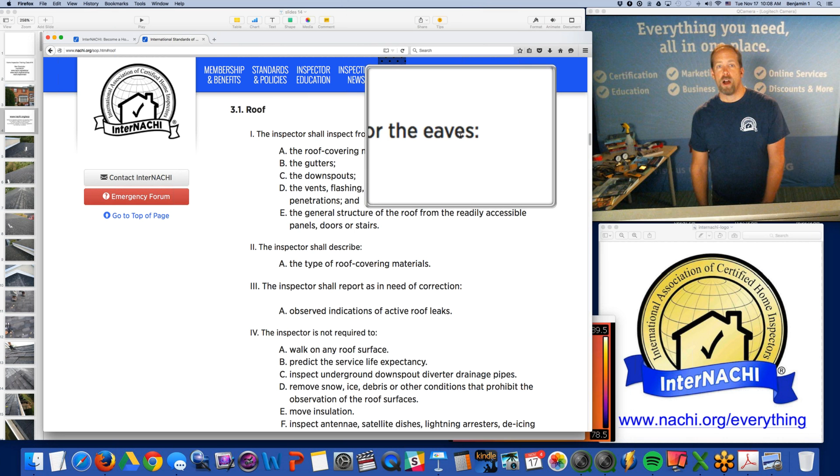The roof covering materials, the gutters, the downspouts, the vents, flashing, skylights, chimney and other roof penetrations, the general structure of the roof from readily accessible panels, doors, and stairs. You have to describe the roof covering materials and report as in need of correction any observed indications of active roof leaks. That's pretty easy. I understand that. So let's do that.

But when I get up there, I basically take pictures of every field, every plane, every surface first. And then I focus in on a few things. I also take my brand picture.

This kind of picture is in the inspection report so that someone else, other than my client—maybe a friend of my client, a coworker of my client—reading the inspection report, because I know I give multiple copies out and they pass them out, and the real estate agents read them too, they'll come upon this picture and go, that's the inspector I want to hire. So that is what I do in order to beat my competition.

Also, I make sure that my clients know that I inspect the roof up close. So my hand is typically in the pictures, the video, and the inspection report a lot, so that they understand I'm there personally and up close. And while I'm on the roof, I want to take a look at the gutter as well, and also the back yard and any components back there.

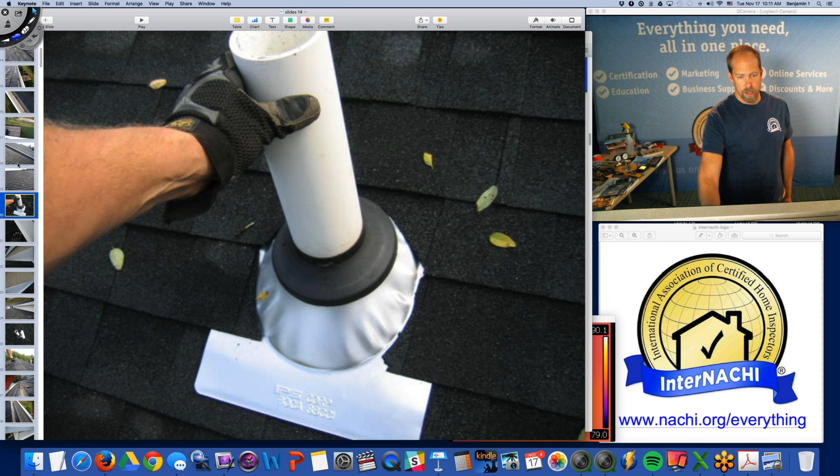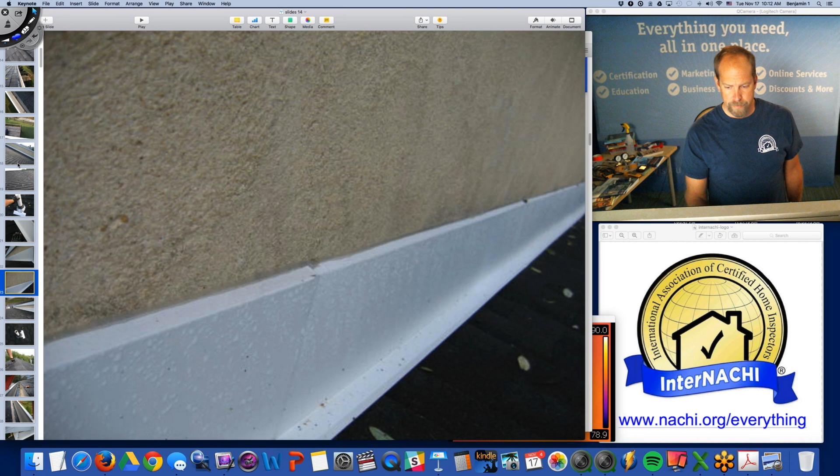And that's from the roof. The roof is in good shape. New, actually, not original to the house, because I could see from the neighbor has an older roof in poor shape, original. So I can kind of gauge the roofing materials. And there's a step flashing, so I can see counter flashing. It's sealed along the stucco. That's nice, the workmanship is really sweet. And I can also see step flashing installed. That's really good, I like that a lot. Really good details.

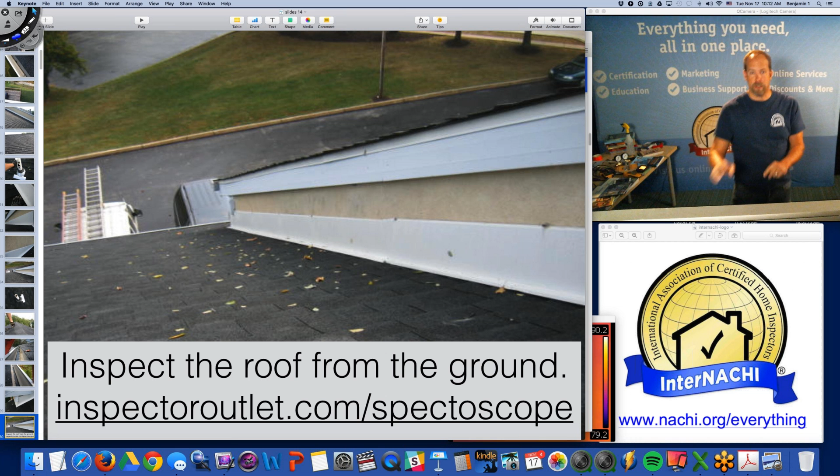So if you don't want to inspect the roof by standing on the roof, there are a few options. You're required to inspect it, but you can inspect it from the ground, maybe with some binoculars, or we have a spectoscope, so you can inspect the roof from the ground essentially using it. The spectoscope is a tool, again, from inspectoroutlet.com, and it's a really high-tech way to inspect the roof.

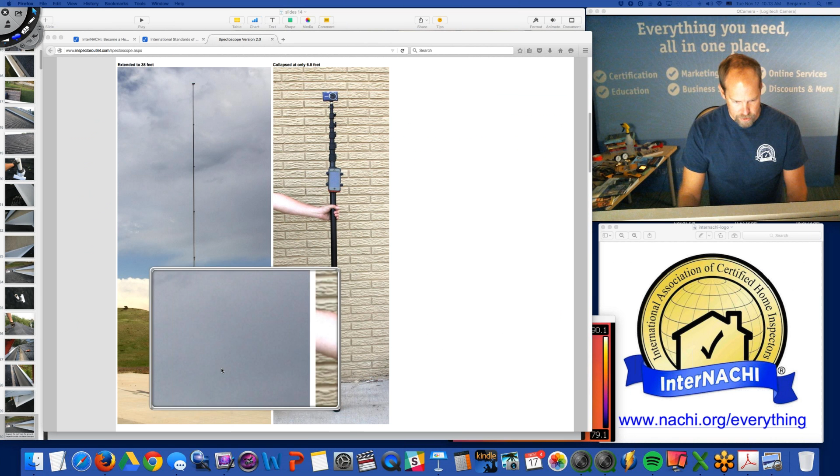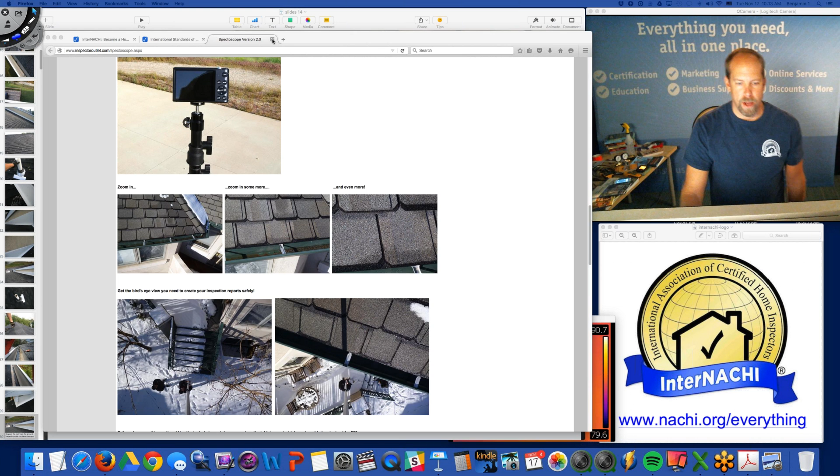This pole extends about 38 feet up in the sky. There's a wireless connection from your mobile device, iPhone or iPad for example, and it connects to the camera on top of the pole. It's very lightweight, and it collapses down to about 6 feet. There's some pictures there. So this is the home inspector down there, and the pole goes all the way up to the top. Yep, so that's a great tool that you may want to consider using.

You may have to, if you and I were in competition, because I'm getting up on the roof. How are you going to distinguish yourself from others? How are you going to ensure that you are inspecting the roof just as good as me? If I'm inspecting the roof better, how are you going to beat me in the market? You have to think like this: what is your brand, how do you do things, what is your message, how do you inspect the roof better than your competition? If you can do that for every system and component, you basically are better. You should be hired regardless of your prices, right? It's the service and value of what you bring.

As I come down the ladder, I see some opening gaps where the different materials intersect. There's a shift, could be a little settlement. I'm not too concerned, I'm concerned about water penetration. It's kind of a maintenance issue. But I'm going to take a look on the inside, see if that window was jarred, maybe replaced. Something's going on, and this is always a problem with these little bay window roofs.

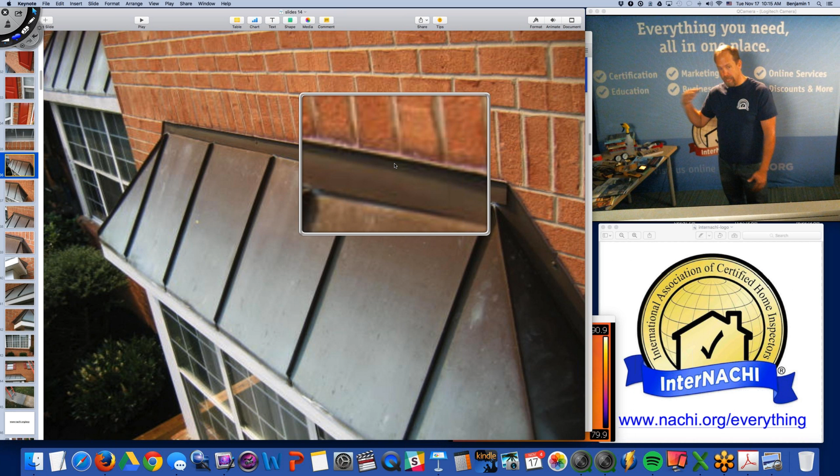The flashing is not grooved into the masonry, unfortunately. Basically, you get a piece of metal, you glue it up, and you fasten it onto the masonry. That's not always great. So when I'm on the inside, I keep remembering what I see on the outside. I got that stuff on the back side of the backyard, and now I have this in the front, and I want to make sure I see this on the inside of the home, because there's usually a problem in my experience with this type of installation.

So now I'm done with the roof. I get down from the roof and use a mobile device. That's how I can do 2 inspections a day. I spend about 3 hours per inspection, about an hour driving in the morning and in between, and I'm home before 5. So mobile devices are really handy.

When you do the inspection, you stop after every system, enter the data, the condition of the roof and all the things you were supposed to inspect, tap, tap, tap, and make sure you took your pictures. Now you're done with that system, done with the report for that entire system. I don't have to write it at night at home. I want to be with my kids, my family, my wife, chill out. I don't want to be in the office. I'm done writing, so when I'm driving home, I'm actually done with my work. I'm completely done with my inspection reports because I buy software with mobile device capabilities.

A lot of people ask me that.

By this time, my client, remember I show up early, is in the driveway, or maybe hanging around, and I can talk to them. I come down, first thing I do is, if I can write my report, great. I smile and shake my client's hand, and typically their agent, maybe family members, and pass out a lot of cards. I don't give 1 card to a person, I always give 5, I pass them out. And you can order marketing through InterNACHI. We design all the marketing for you for free.

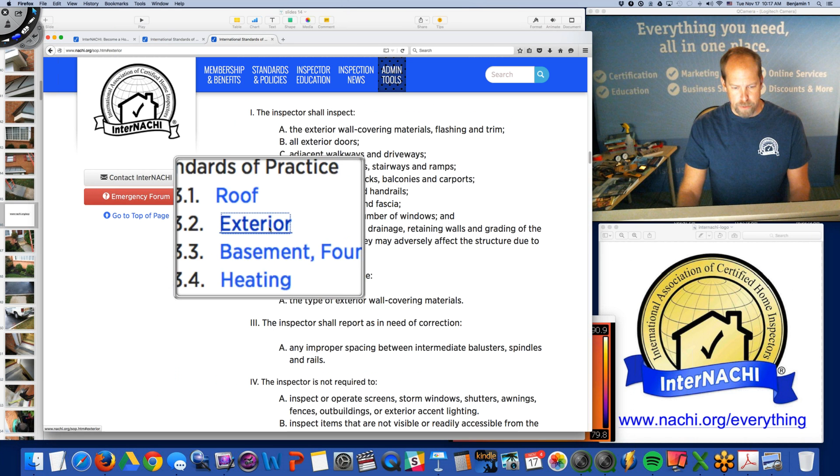How do I do the exterior inspection? Well, I follow the SOP. The SOP tells me exactly what to inspect - the inspector shall inspect these things. So it's pretty easy, that's the procedure that I use.

So on this home, narrow home, townhome, I'm looking at this trip hazard at the front walk. The walk could be raised up. I always take a picture of my truck.

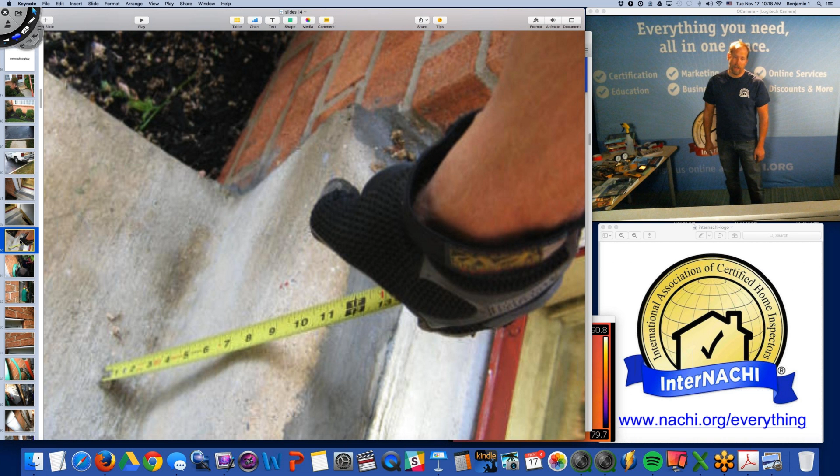When I inspect a door, I inspect top left corner, top right corner, bottom left corner, bottom right corner. This door tread landing area was sealed up with some masonry that's probably going to crack later on, but they probably should seal it with something that can expand and contract. I always take a picture of me taking a measurement of any trip hazards. This is good - easy 7-11 rule of thumb that I use.

There are personal items in my way. A picture's worth 1,000 words - I can't see everything. There's dense vegetation and a lot of things in my way.

They were using some spray stuff, no big deal, but I was taking a picture of the window, actually. The header on the window is an iron steel I-beam, essentially, above the window opening, holding up the exterior materials, the masonry materials above this opening. The mortar is then applied on the outside, typically really thin, like 1/2 inch, 1/4 inch. When the metal is exposed to moisture, which sometimes happens, it swells a little bit, pops the masonry. The mortar is loose, it blows out. The aluminum capping is sometimes open as well. This can be easily sealed up along here.

And we can talk about weep holes as well later on.

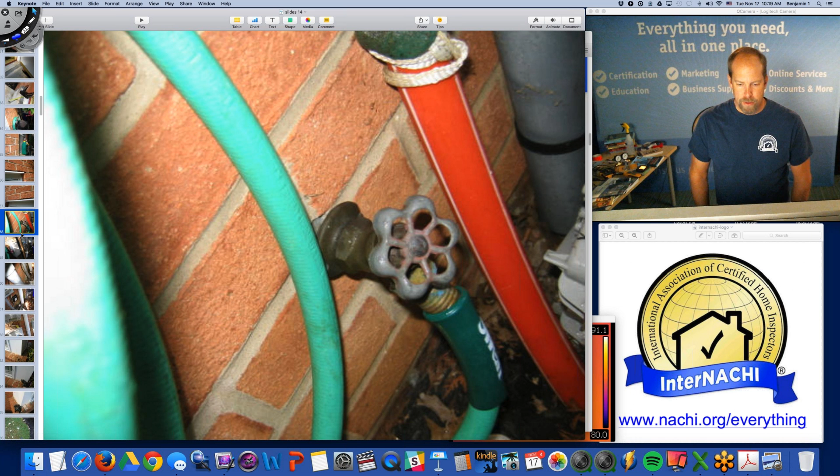Frost-free hose bibs - this is a home in Pennsylvania, so it's a cold winter climate, and these water pipes, these water faucets, hose bibs, freeze up and burst. So this should be a frost-free hose bib, and it's not.

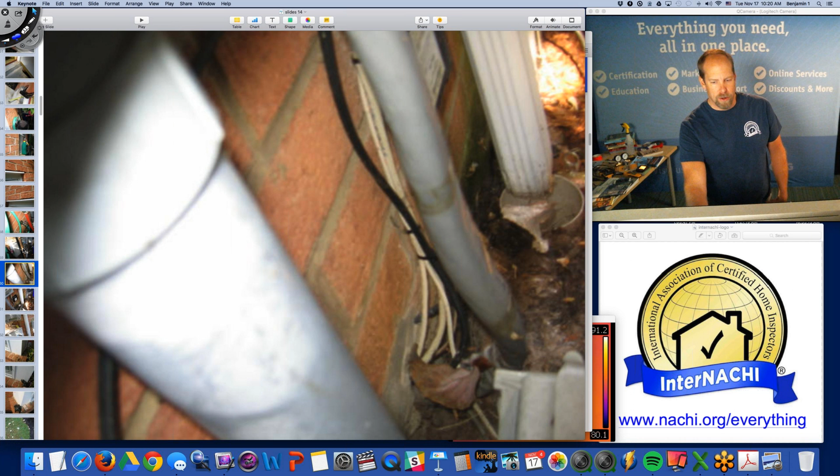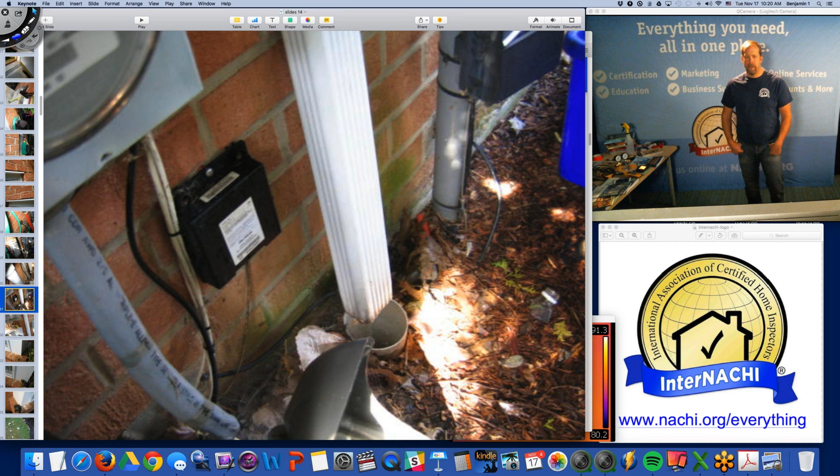There's the electric meter, electric line going down into the panel, down in the basement - I'm assuming there's a basement now. And a disconnected downspout to the underground pipes. You're not required to inspect underground pipes, underground anything. There's a bit of a disconnect between the downspout and this underground pipe. Probably the grade just settled a few inches, and no one's noticed it because it's under dense vegetation.

And I love to take a close look at where different materials intersect with each other. How does this wood, which is a one inch plywood piece of material, natural wood, is it wicking up moisture?

The bottom is probably not primed or painted. I don't see any flashing kicking out water from the wall, maybe the space behind the exterior material. It's simply sealed up, and there's some deterioration of the paint and the wood.

So I'm at least going to tap, push with my fingers, tap with my screwdriver, and probe with my screwdriver. That's something to be monitored. There's exterior drainage, an underground pipe right there, probably connected to the downspout underground pipe. Some utility connections, main water shutoff valve in the front yard, and don't forget the doorbell.

Now the deck. Before we get to the deck, I have some questions here, I think.

Stephen asks, how do you handle when a roof is too tall for you to comfortably climb? I don't do anything that's not safe, really.

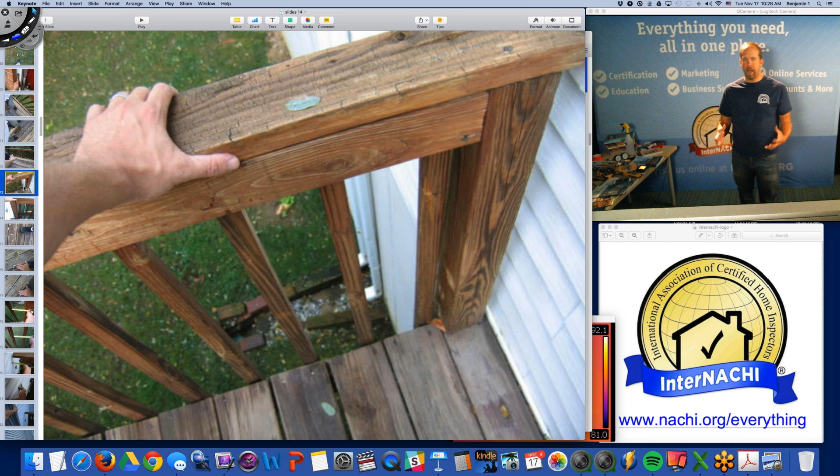Making a lot of money is really two things. You got to be good at what you do, and you got to be good at the message you give. You got to be good at marketing and good at inspections. InterNACHI provides everything — that's why we have that everything page. Everything you need to be successful is there.

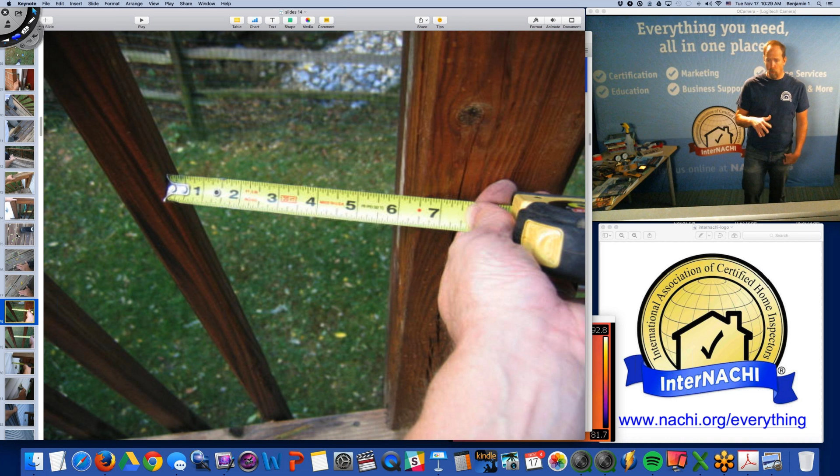Decks. Love decks. Love above ground decks. In Pennsylvania, for some reason, they threw up decks as fast as they possibly could, and they were all really bad. There were a lot of deck collapses. So this one is about 10 or 15 years old, same age as the house. There's spindle spacing issues, so this deck was not built to code when it was built. Some 30-year-old decks have spindle spacing you could fit a truck through.

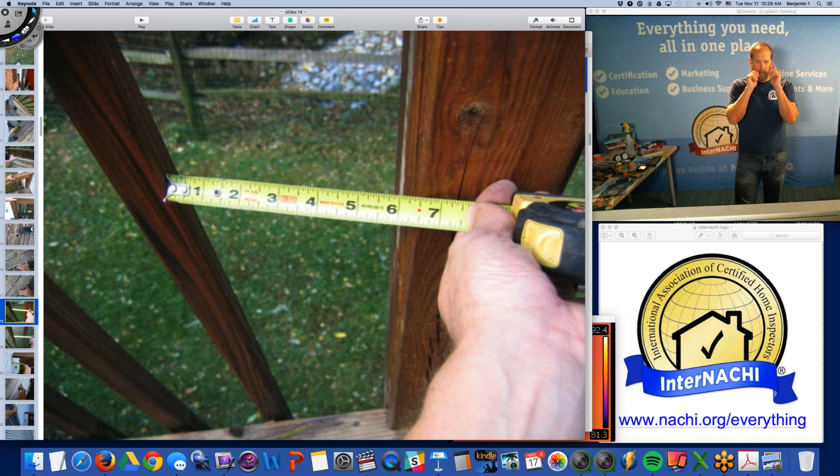I'm not a code inspector, but from modern building standards and best practices — call it code if you want — I know this space is supposed to be really small so a child's head doesn't fall through. I'm calling it out, and it's actually required by the standards of practice. So I take pictures of those hazards.

GFCI should be protected. The vinyl siding looks good. I take a picture all around. I don't know if you noticed, but I just went like this — took a picture, took a picture, took a picture, took a picture. I took 300 pictures on this townhome inspection. I don't take one or two, I take 300 or 400.

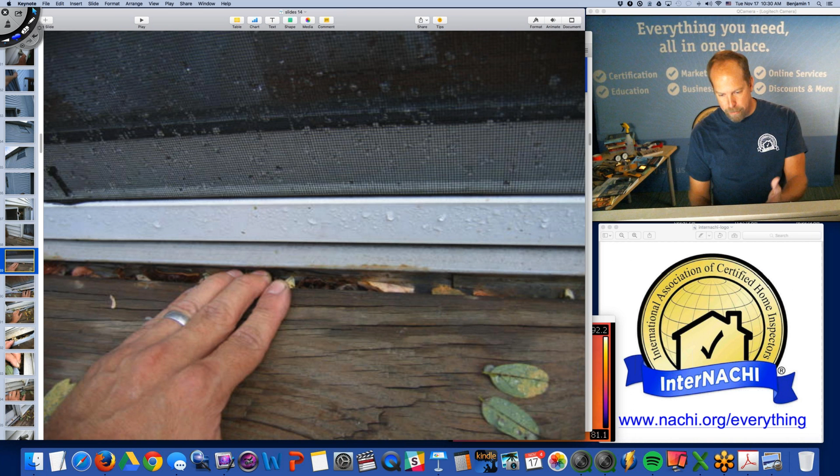Here's an opening in the exterior building envelope, the exterior wall. Top left, top right, bottom left, bottom right — get in there, get up close. Bottom left, I see flashing. Great, awesome, I see metal. There's some separation, like they used step flashing or something underneath the rear door slider.

This would be on the first floor. There's a basement, and a deck on the outside. This is the door slider to the deck in the back. I see flashing, ledger board flashing, but I can actually pull the top edge of the ledger board flashing, and it's been heavily siliconed with white silicone, clear silicone.

So this is a hazard, right? This is a condition that's conducive to deck collapse. I use the word imminent a lot — it shall happen if left alone. This deck will collapse. I'm not even sure if it's safe now to walk on because of this condition. It's historically known that if a deck attached to a house has bad ledger flashing, in a wet climate like this, that area is going to be loose, the deck's not going to be attached, and it's not reliable.

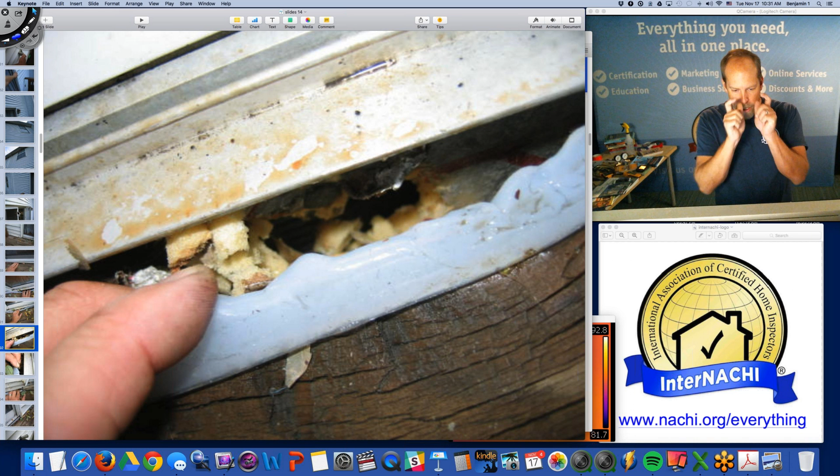So I get up close. There's a little macro, micro setting on every camera — get up nice and close. I see that's the insulation sheathing board of the exterior wall. So now we're even through some layers of exterior material.

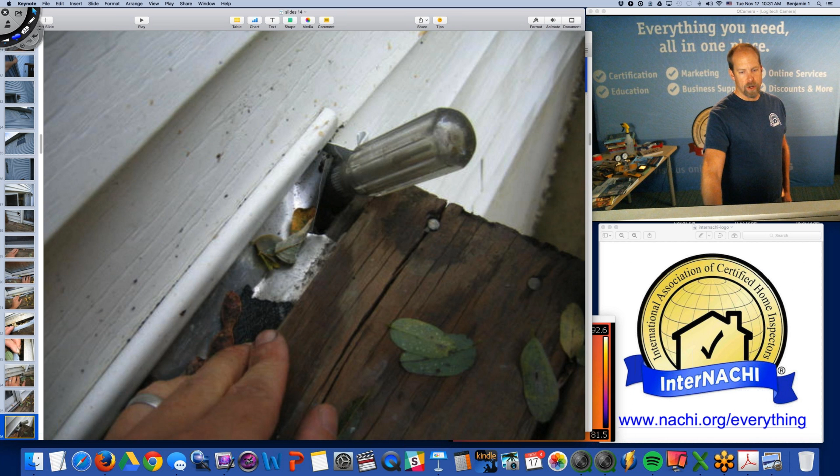And my screwdriver. I love to throw my Husky screwdriver right in a hole to show scale, even though my hands are in there. And there's a hole over there too, at the corner edge of the deck. So the deck is not reliable.

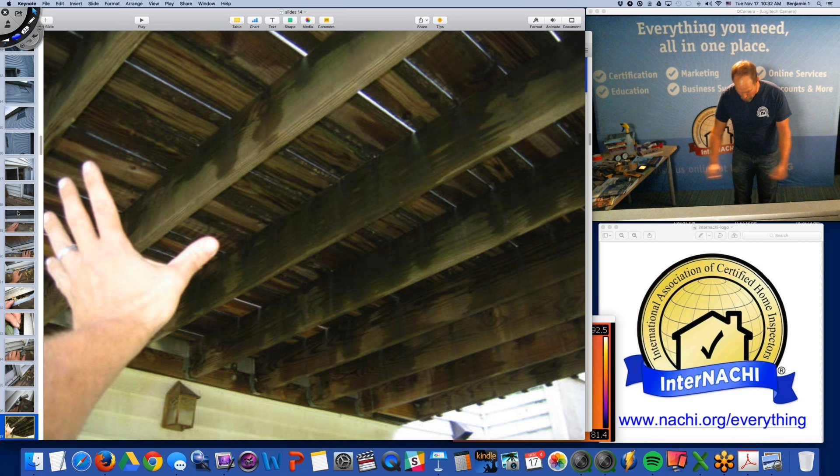I get down from the deck. Now I'm doing the exterior. Did the roof, front, exterior. I'm on the deck, I took off my shoes. I have indoor shoes only, I walk through the house with my indoor shoes only. I come out, I'm holding my exterior shoes, put my exterior shoes on to get on the deck, do my deck thing, come back out, indoor shoes only, go down in the basement, carrying exterior shoes, go out the slider door of the basement, put on my exterior shoes. I respect the house that I'm inspecting as if it were my own.

This deck floor structure is unsafe. It's a material defect, which poses an unreasonable risk to someone who's standing on it, like a home inspector. I have missing floor joist supports. This board is actually pulling out.

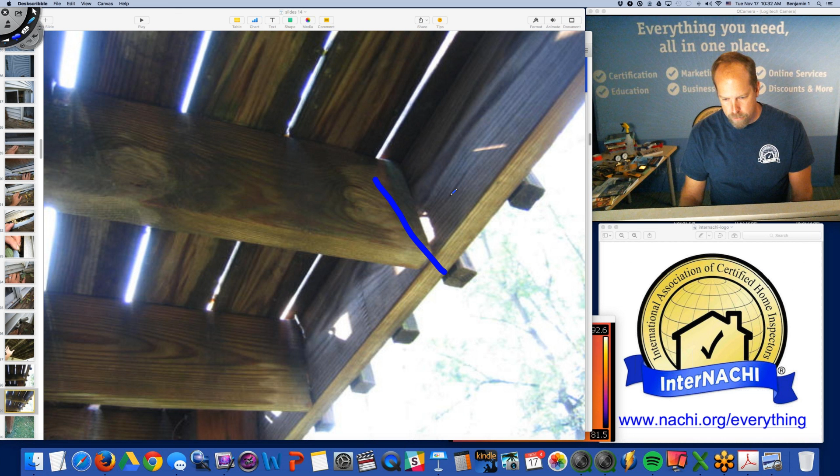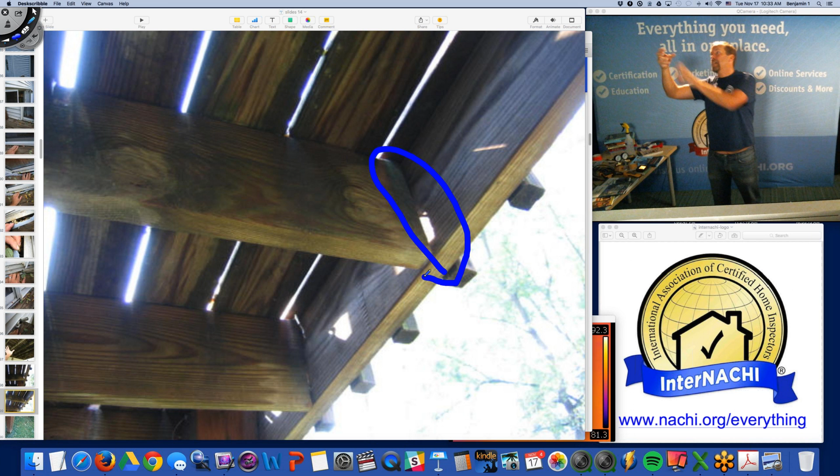And how do I find this? Well, I look at a component, and if it's a structural component, I want to know how it's supported or how it's connected. If there's an end over here, I want to see that end. If there's an end over here, I want to see that. It's very simple. So for all the floor joists, I would love to see where these things are supported. And on the outside ledger board area of this deck, it's actually pulling away. It's withdrawing. You can see the nails. You can see the nail right there. So that's kind of fun.

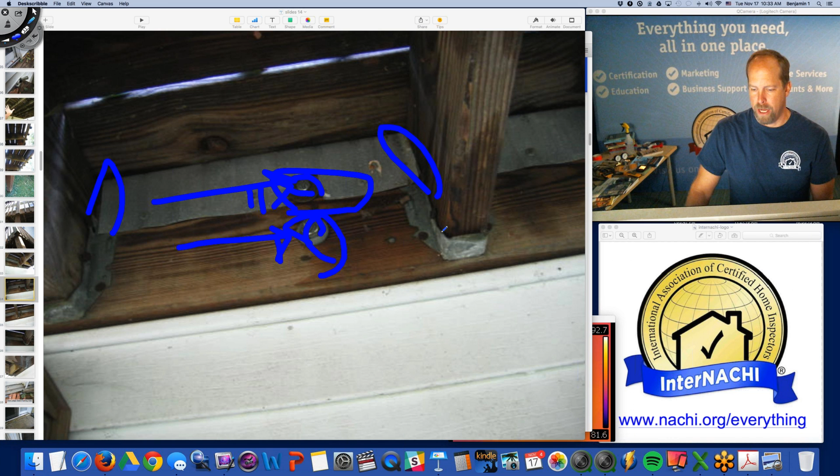So we have a lot of problems. The flashing is not installed properly. We have openings in the flashing. We have some weird stuff with the different types of lag screws. Like they installed this one first, and then they came back and installed this one later. I don't know why, they're different diameters. So if this one is required to be this diameter, why is this one a smaller diameter? Why are there screws with rusty nail heads here? Why is this bottom of the floor joist hanger rusted and corroded? Same thing here, same thing here. This is all messed up, and I don't see any flashing here. So there's supposed to be flashing here, Z flashing here, ledger board flashing here. So a lot of problems with the deck. Needless to say, I didn't ask anyone to go on the deck with me.

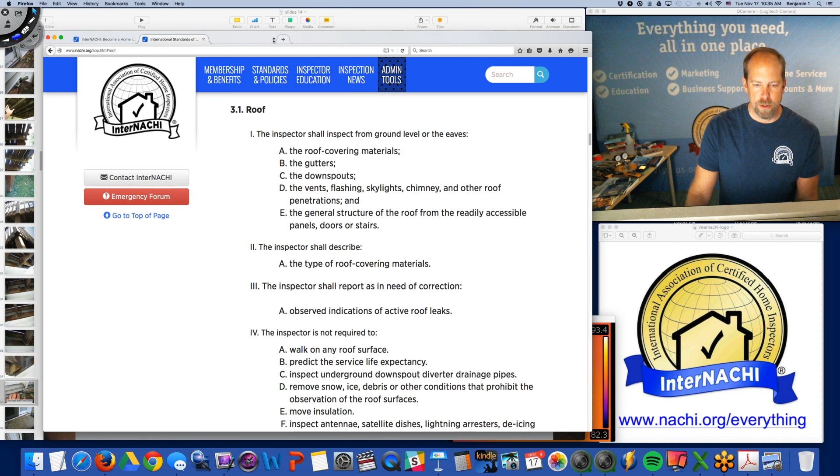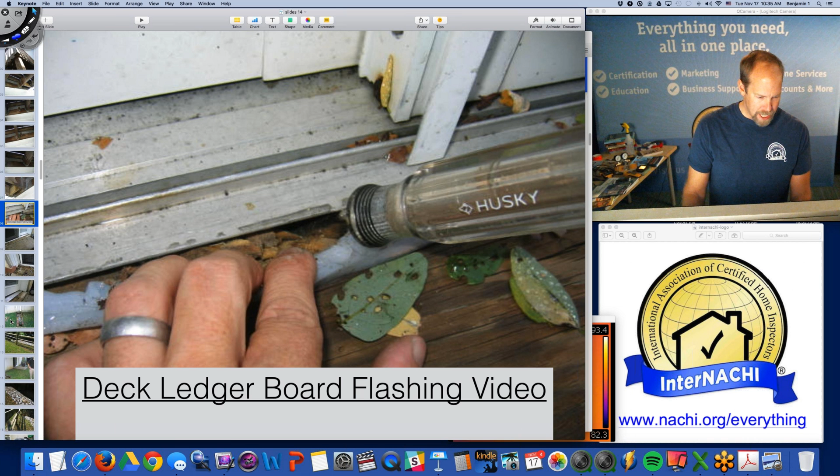So ledger board flashing, we actually have a video. Let's look at both over and under ledger board flashing. So I don't know if you recognize this guy. Now the exterior wall covering below the deck, the bottom Z flashing, counter flashing, sometimes a self-adhesive membrane, the ledger board itself, the top Z flashing, counter flashing that overlaps the Z flashing, and the exterior wall covering, which overlaps the counter flashing. Aluminum flashing is... That's a little training video that we did with some cool graphics, just upon the complexity of installing a proper deck board, ledger board flashing area. It's really complex, and it performs really well when you do it right. And it's a lot of fun to inspect when it's not done well at all.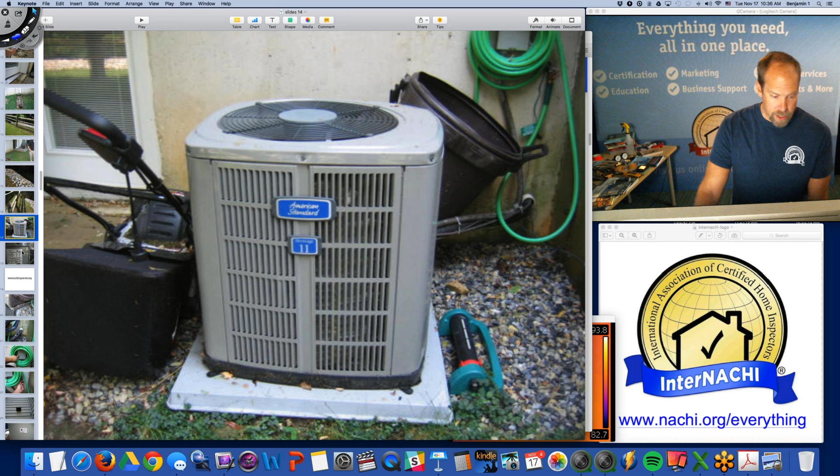American Standard looks like an air conditioner, but it's actually a heat pump. And if you wanted to age a heat pump or an air conditioning unit or a hot water tank, use the serial number. This is the serial number here, right there. I take a picture of all of the manufacturing plates, and you go to buildingcenter.org. This is a fantastic website.

I want to take you there. You click to get the age of the HVAC unit. You have to pick the manufacturer out of this list. So I have to go back—it's Heritage 11. No, that doesn't sound right. It's American Standard; Heritage 11 is the model number. So you go back, and American Standard is right there.

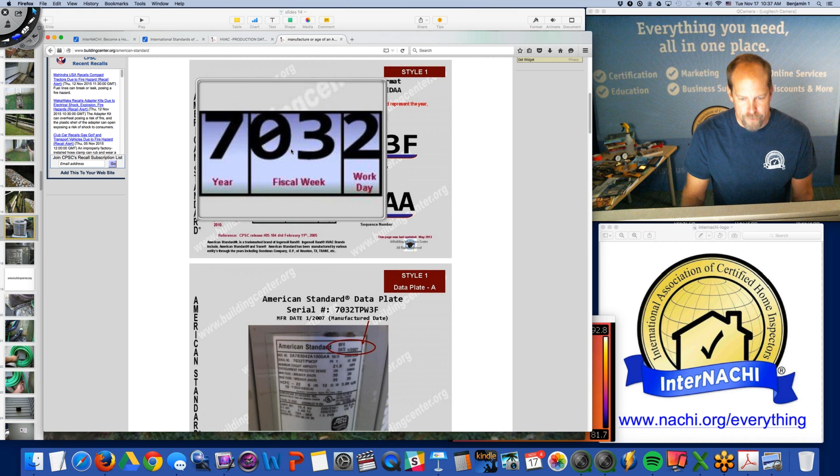You could do this after the inspection. They don't have a very good app for doing it in the field. You have to pick the format for the serial number, and that'll help you determine the age of the unit. This is the format that I have: 4 numbers followed by 4 letters, I think, right? So let's go back—yeah, 4 numbers followed by 4 letters, and it's the serial number, not the model number. The first number is a 4. So what does that mean?

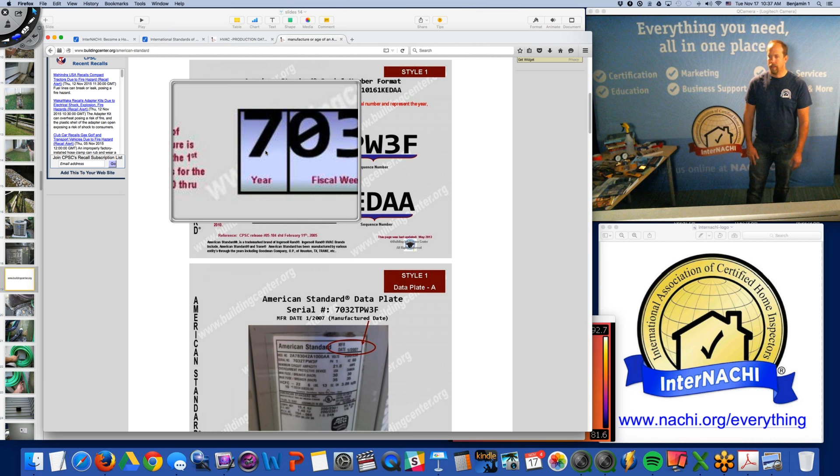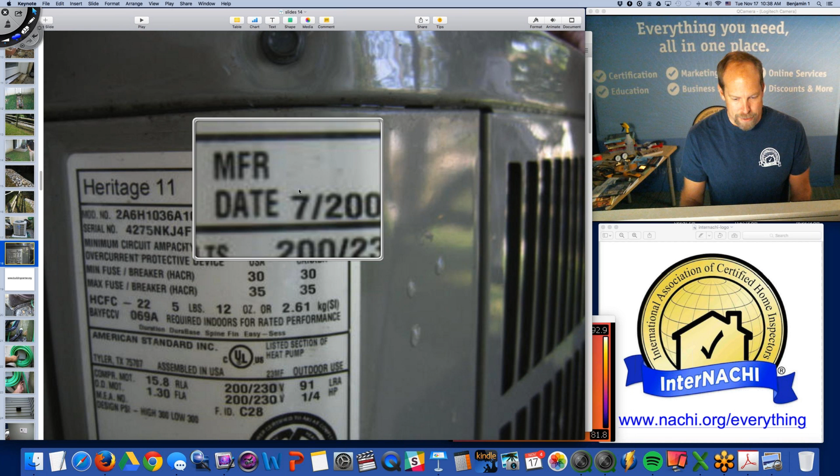Go back here—the first number is the year, and that's an example. 7 is 2007. Well, I have a 4, so it's 2004. And then the week, so I can tell my client exactly how old that heat pump is. It was made in 2004. I didn't have to go through all that, because actually at the top right corner it says manufacturing date, July 2004. But not all manufacturers, like American Standard, provide that nice information for home inspectors—you have to look it up if you want to.

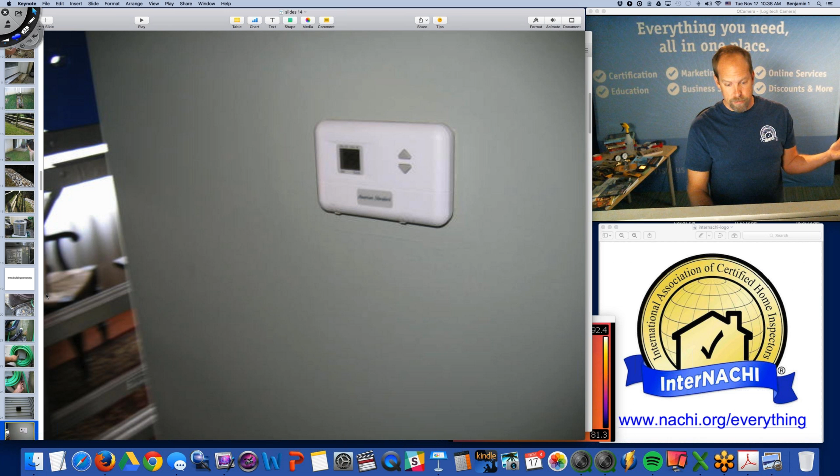Refrigerant line, suction line, insulated, goes through the foundation wall. The electric disconnect is within sight—that's good. No frost-free hose bibs on the back side. That's a bathroom, kitchen, dryer exhaust hood—can't get to it, it's above my head. Thermostat—it's not an efficient programmable thermostat, it's almost like a manual one.

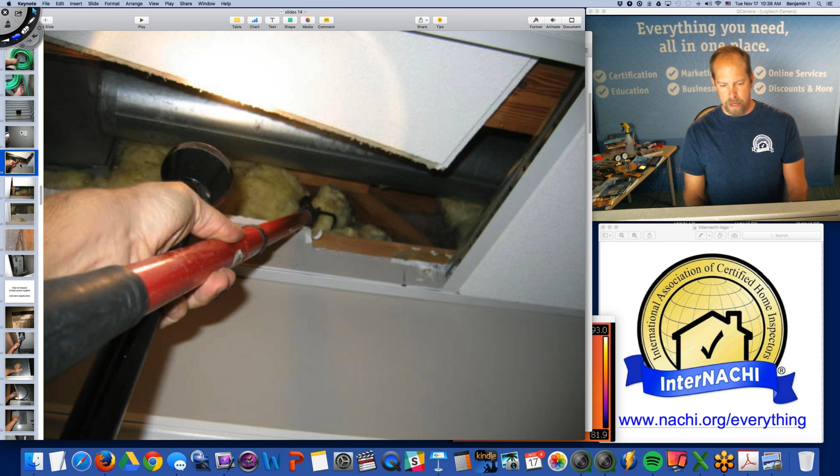I go back in, now I'm doing the interior. I'm in the basement, following the standards of practice about inspecting the structure of the home. And I go right to the ledger board to see if there's anything I can see more—water, mold, moisture, conditions conducive to mold growth. I know you have to follow your local regulations about saying the word mold or being a mold inspector.

I would get licensed or certified if you have that opportunity. It's really worth it, because all good mold inspectors are moisture inspectors. We have a moisture certification program if you're interested in becoming a moisture inspector and then a mold inspector. So I move drop ceiling panels when I need to. I do them randomly, and I do them intentionally at specific areas, like this ledger board area.

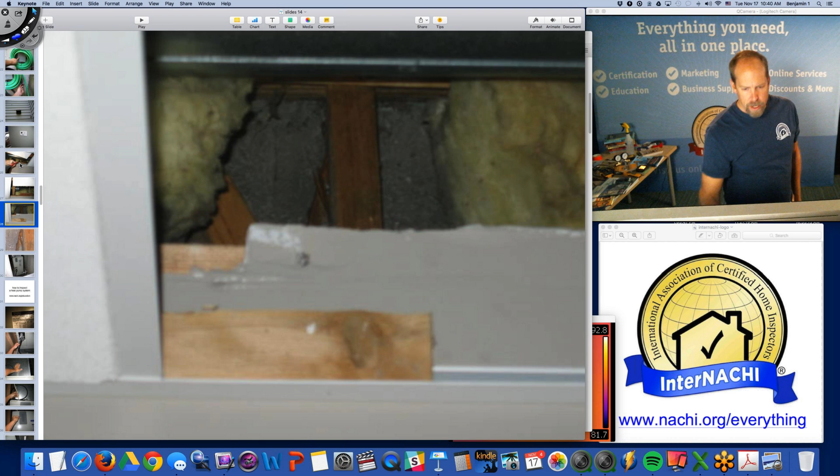You're not required to move drop-down ceiling, but I do, and it usually turns out like a good guess. So here I can see—remember those two lag screws? One was installed bigger and the other a smaller diameter. I think that's because that one missed the structure, the wooden component, so they had to install another one, but I don't know. That's another indication of poor installation—the lag screws of the deck ledger board weren't even attaching securely to the structure of the home.

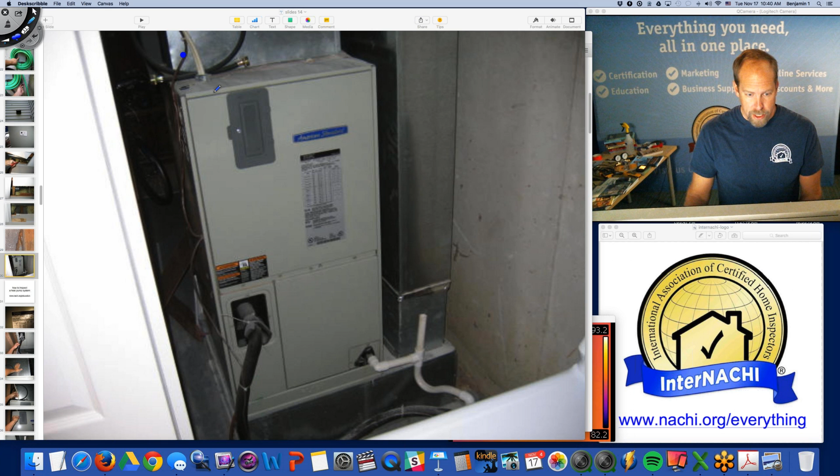Heat pump interior unit, that's the evaporator. I can see a few things from 10 feet away. I know this is not a gas-fired unit, it's electric—there's actually an electric line going into it to the heating element. There's my refrigerant lines going in. I have a condensate line with a trap, that's good, it's draining away. I have ductwork, and by the orientation I can see airflow goes like this. I'm expecting an air filter down here, and air comes up through the evaporator, gets heated or cooled, and then is supplied that way, and I'm looking at all the joints.

Sometimes if I can, I'll take this part off, pull this front off, pull this off, look at something—maybe the evaporator, maybe some other components inside—and take a look on the inside of the unit if I can.

If you don't know how to inspect a heat pump system, no big deal, because InterNACHI has an online course. It's on our main education page—there's a huge list of online courses that are free to our members. If you search for HVAC, you drop down and here's our HVAC course, how to inspect HVAC systems. A heat pump is an HVAC system, and there's a whole chapter on heat pumps, with a short introduction and a really nice graphic about the heating cycle and cooling cycle.

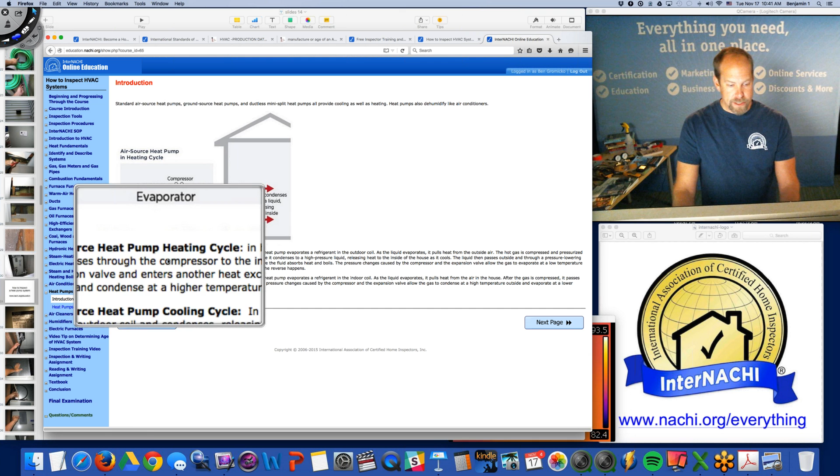And then you click the main slide, and it talks about the types of heat pumps: air source, ground source, ductless mini-split, the cycles, the heating cycle, the cooling cycle, the defrost cycle, the interior heating element, the compressor, a typical defrost cycle, and causes of frost. That's a really good resource to use if you want to know how to inspect a heat pump system, or if you think you already do.

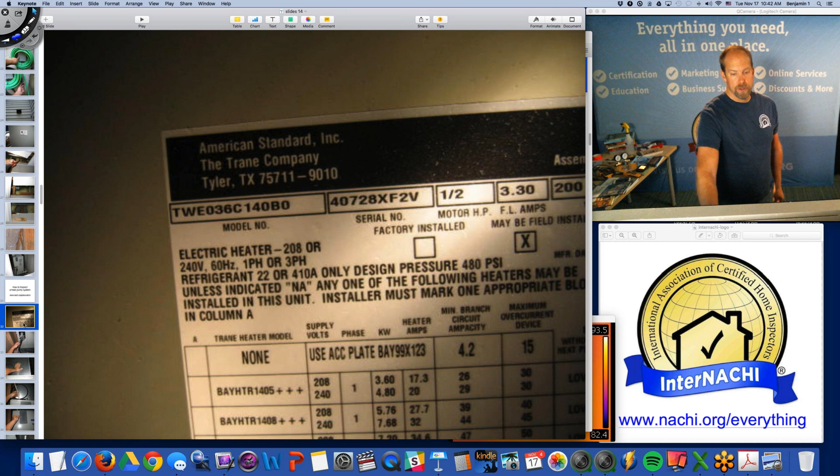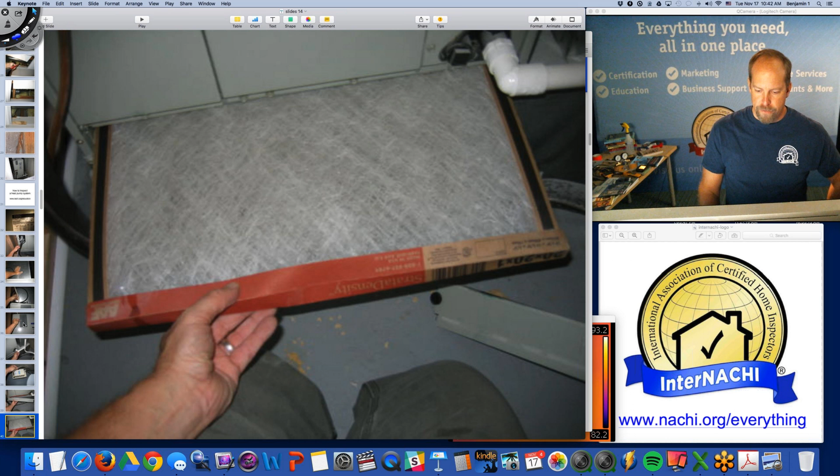Maybe you need a little review. There's a serial number, manufacturing number. We can look it up, but we don't. I know some of you, like in Texas, are required to test a few components and even measure the temperature, the delta T, the in and the out. There's a little condensate pump. This discharges outside. There's the air filter. I pull it out. I take a picture of the size so that my client knows what the size and location is and the orientation of the air filter.

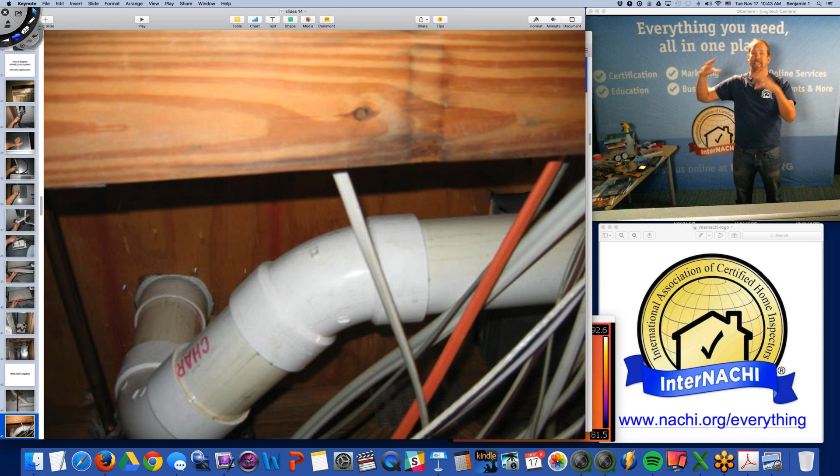Follow the standards of practice, and the next thing up is plumbing. There's the drain waste vent pipes. So when I'm in the basement in particular, I look above and I'm looking for anything that's connected. Like this is a toilet flange I can see. I'm following the way water moves, just like I follow the way water moves from the roof, exterior, and grade. I follow the water inside the home. So I do the discharge first, then water supply second, then hot water source. So let's do that.

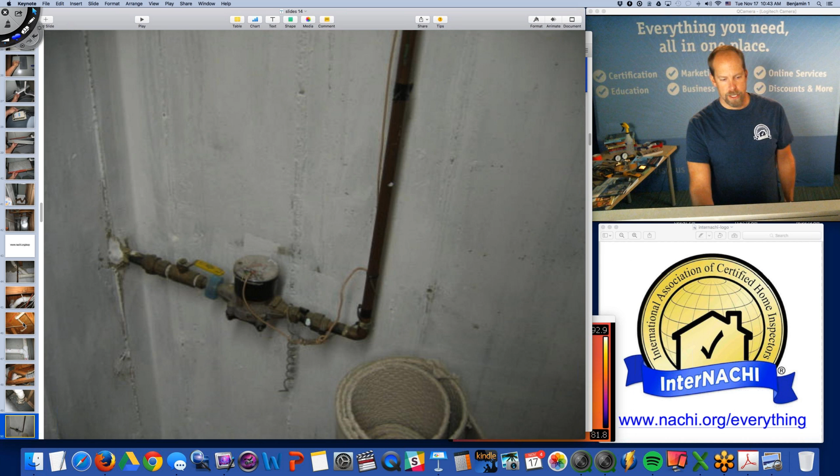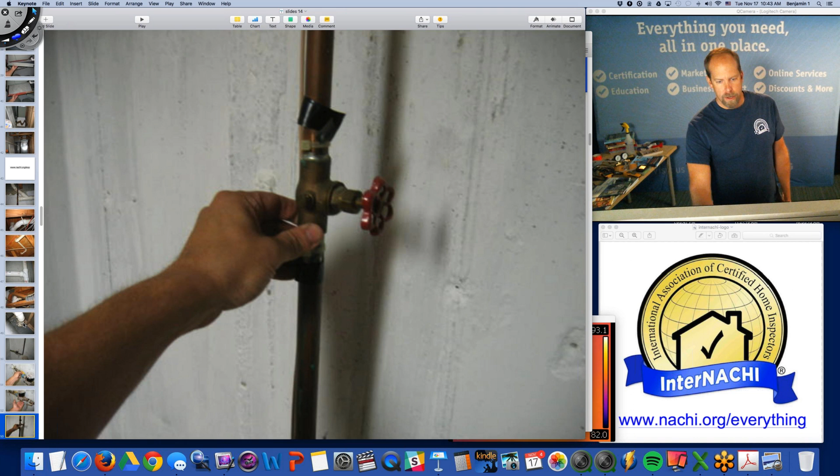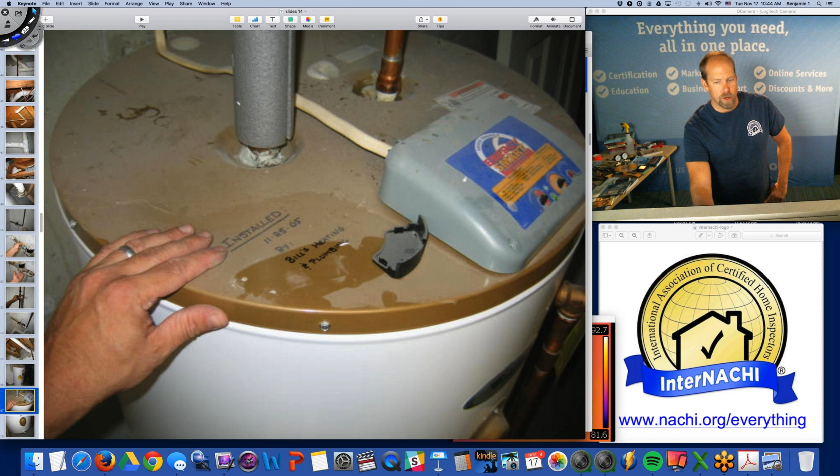There's the hot water source, water tank, water heater. It's installed in 2005. It's got a little efficiency smart timer on it, that's nice. The size of the unit, 50 gallons. Shutoff valves on the hot and cold. Discharge TPR valve. Good stuff.

Electric panel. I come to the electric panel and I open it up. One thing, be safe. You are not required to remove any dead front cover on any electrical panel. Don't do it. There's a lot of high voltage there, but if you're going to do it, understand that it's hazardous and you're not required to do it. But if you do, go beyond the standards.

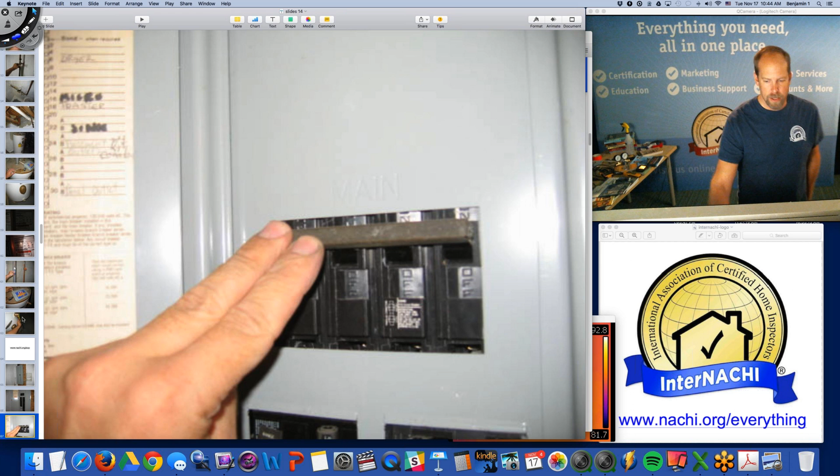Wear some safety equipment. Two fingers means 200 amps, 1.5 means 150, one finger means 100. Little tip there. I take a picture of every breaker to make sure that they're all on. If they're off, I don't reset it. If it's tripped off, I take a picture of that trip, there could be a hazard there. If it's turned off, I make sure I leave it turned off. We don't turn any water valves or gas valves or breakers back on if we find them off.

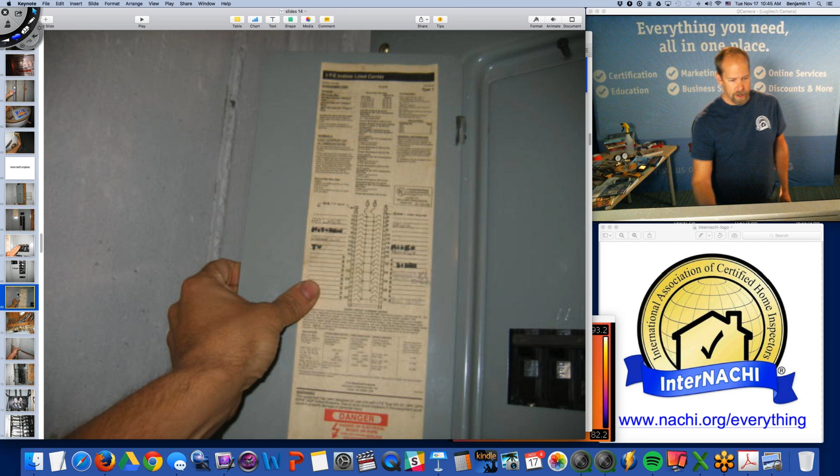Every breaker needs to be labeled and identified for its use. The wires are modern Romex. There's a missing screw at the bottom left corner. I remove the panel, you're not required to. It's 200 amp. I couldn't see any overfusing. Everything looks good in there.

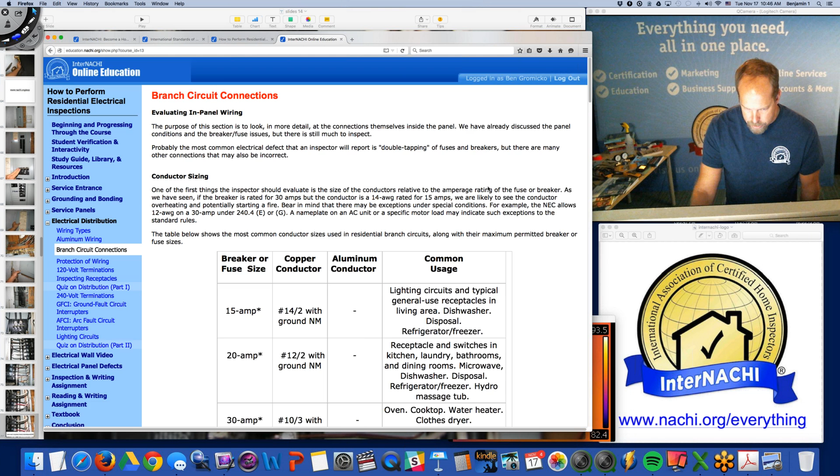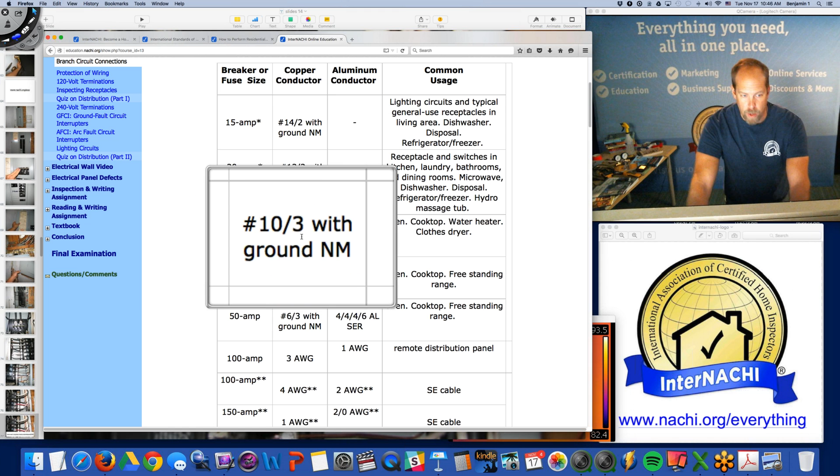But if you wanted to know more about gauging, I don't want to use gauge, evaluating the gauge of the wire in comparison to the size of the breaker and looking for overfusing, a really big breaker on a small wire, we have that kind of training for you, and you don't have to open up an electrical panel. So it's our electrical course, and it's basically just a table. This table shows the most common conductor sizes used in residential branch circuits, along with their maximum permitted breaker or fuse size. So I had a 30 amp breaker, and it should be connected to a 10 gauge wire. So I know that standard.

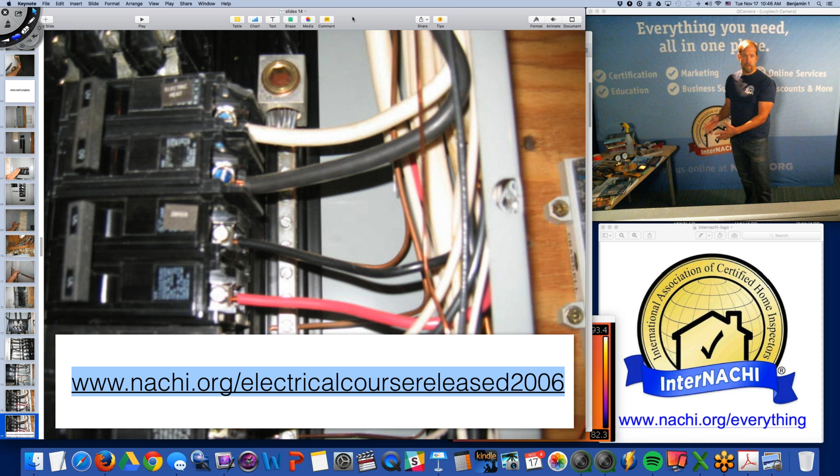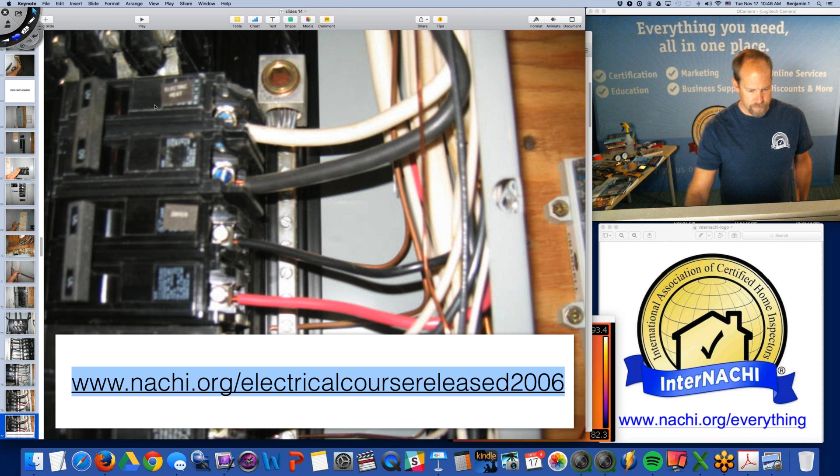I'm not a code inspector, but I know that standard. I use code as a foundation, as a reference really. I can tell my client this is incorrect because of this standard, and it's usually a building standard. And building standards really are safety standards. You know, when they change the code, it's because somebody got hurt. So keep up with the modern standards and best practices and keep people safe.

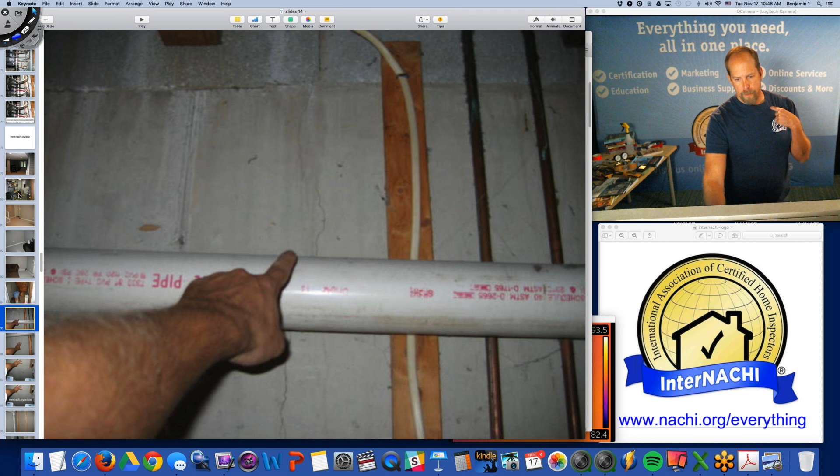A hairline crack in the foundation wall, no big problem here. It's hairline, it's barely open, thinner than a penny on edge, and it's a typical hairline crack. However, if you're not sure about hairline cracks, we have an excellent article written by my brother Nick and Kenton Shepard, who did a massive amount of research on visually inspecting concrete. And you go through everything, even the materials, how concrete is mixed. Then we have really nice high-res pictures of conditions of concrete that you may see during an inspection, including this kind of stuff.

Shrinkage, drying rates in concrete, and things you may see on a driveway or paved way, and also this kind of stuff: some flaking, some patching, and some cracking. Take a look at that, it's a really great article. If you can't find it, it's in our library of inspection articles at nachi.org/articles.

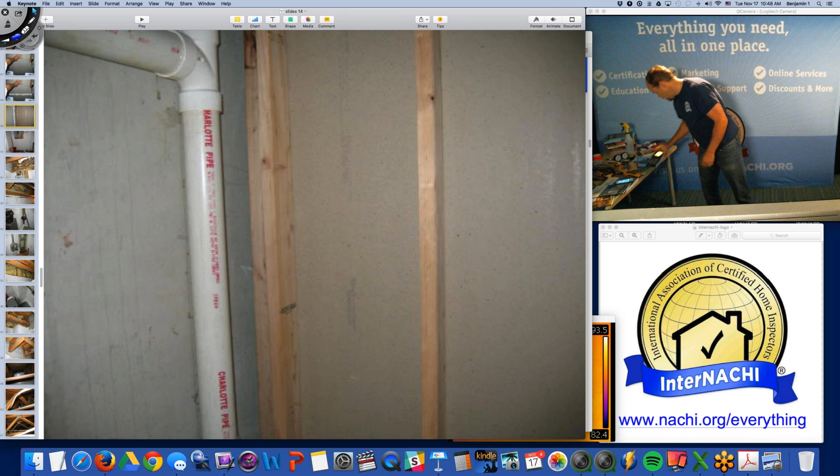But did I show you this? Or was this before class? I think this is before class. So this is my infrared camera, a FLIR C2, low resolution. What it does is provide me the ability to see things that I wouldn't normally see without it.

Kind of like a flashlight—without a flashlight in a dark basement, there's a lot of things I wouldn't be able to see. So an infrared camera, I kind of consider it the same thing. It's nothing special to me. I'm not measuring anything, I could care less about temperature, but I am trained to understand what I'm looking at, which has everything to do with temperature, actually. So you have to be trained before you pick up one of these.

So here's my FLIR C2. I don't know if I can get the camera shot on it, but anyways, that's it. Just an example—what if we get a spray can and throw that there, and then see what it looks like from 10 feet away. Can you see that from 10 feet away? Oh, I don't know if you can.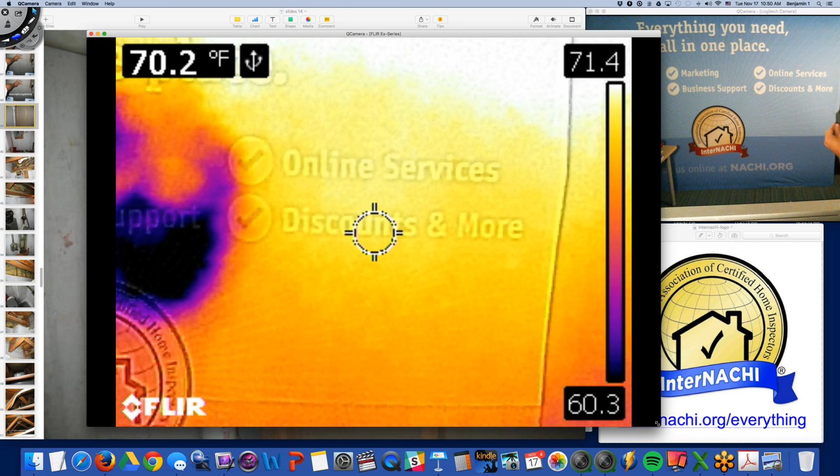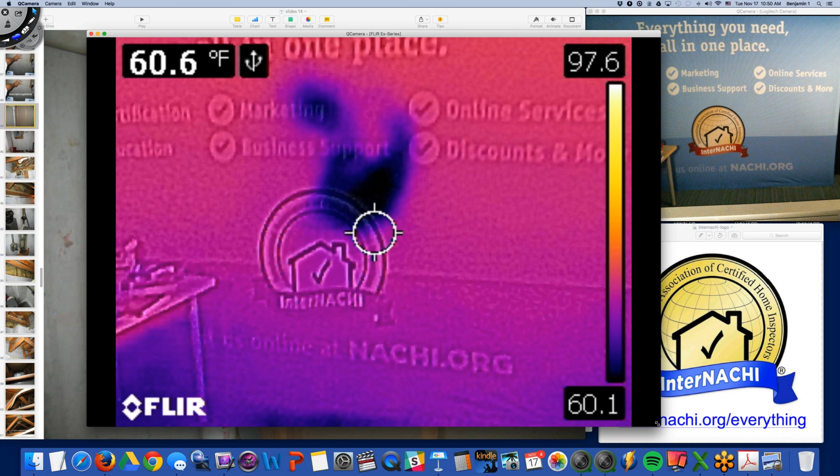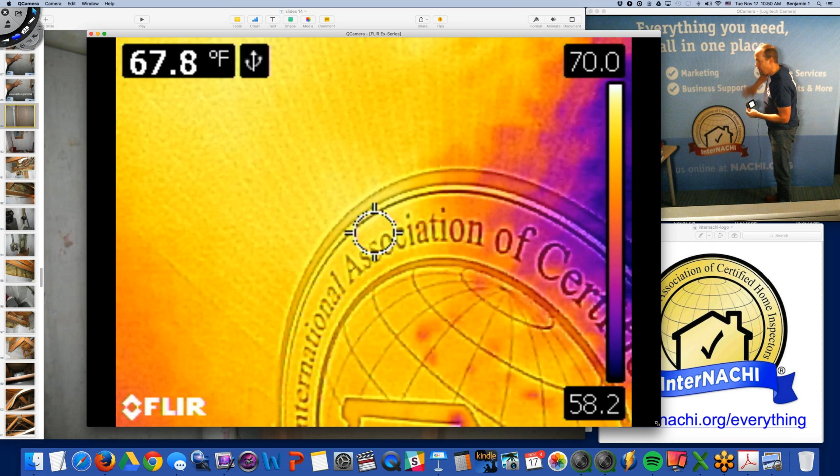So that's where I sprayed, and I'm walking back—now I'm behind the camera for the class. There's my computer and my coffee. So it even sprayed on the floor, the water droplets. To my eye, even to my touch, really can't tell—it could be a little cool here, but I can't tell. I'm not going to touch all the floor space, but from 10 feet away I can see that there's an anomaly here.

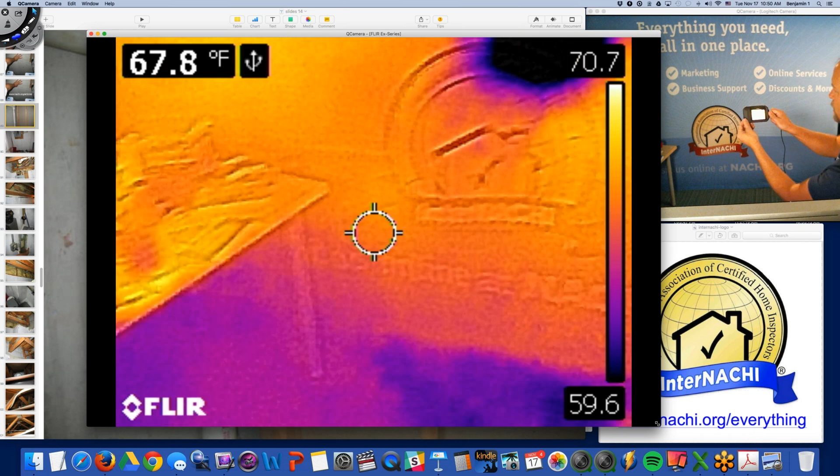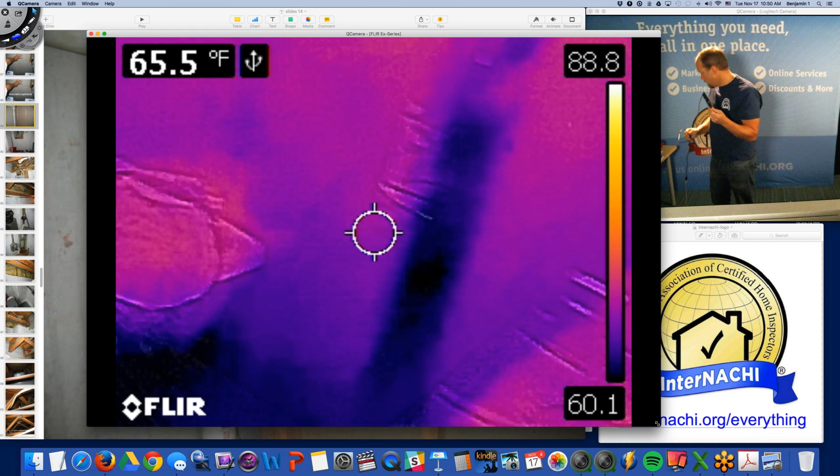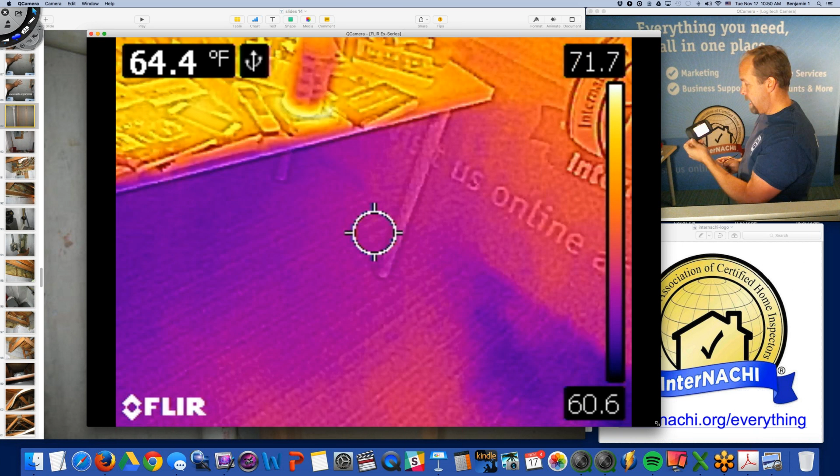And that's all I use this for. I want to know if there's an anomaly going on and there's a temperature difference being shown. I understand what that is, but I actually don't measure the temperature. So this is an interesting tool—it allows you to see things that you wouldn't normally see. You can use it for adding value to your services, and it can be part of your brand and marketing message as well. I really think that's kind of cool. These infrared cameras are amazing.

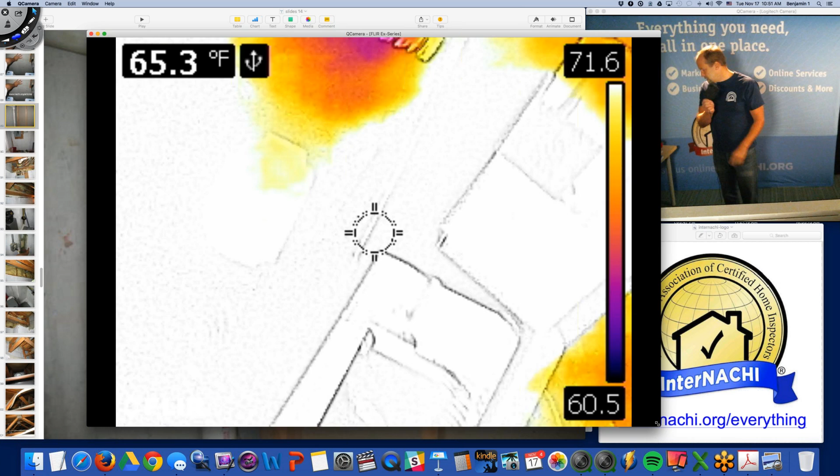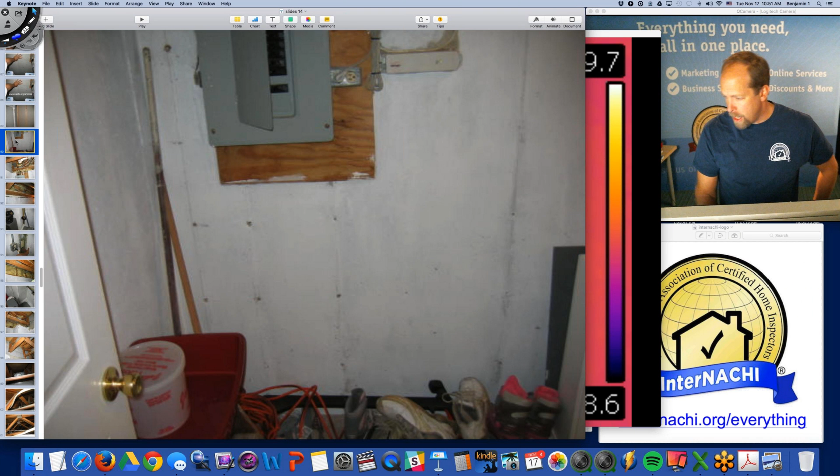Let's go faster. Frank asks about liability issues—are liability issues a concern? Are you aware of anyone having claims filed by clients? I was taken to court. Are they mostly minor claims? Would you please discuss liability and how to protect yourself?

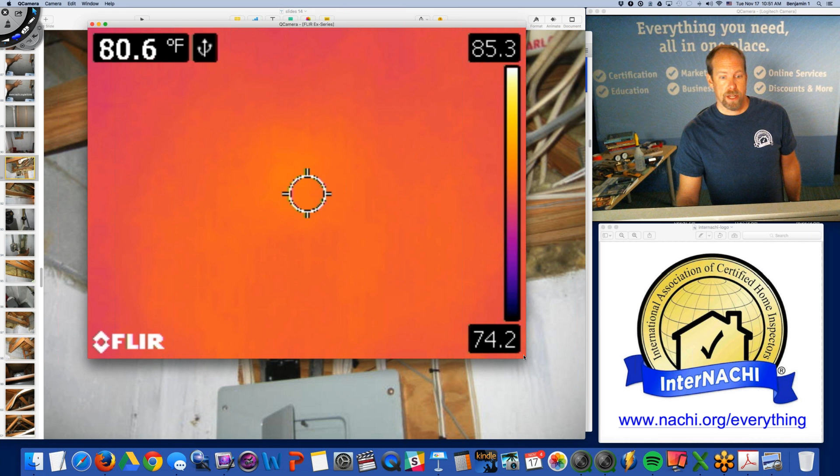Sure. It's fun to be taken to small claims court because, in my experience, I did great inspections and provided great reports. If you were here at the beginning of the class, we talked about using a standards of practice that is reflected in everything that I do and provide to my client. So it's all one message, including my agreement, the contractual agreement between me and my client, and it carries that message forward. They sign an agreement saying they understand the services I provide. I was taken to small claims over a misunderstanding, or someone just trying to get money—it was about cat urine in the carpet, and that's not part of the home inspection, not part of the scope.

I was in and out in about, my partner and I were in and out about 10 minutes, because we referred to the standards of practice, which was reflected in what we did at the inspection, which is reflected in the inspection reports and everything else that we provided, including the home maintenance book that we provided. And the agreement tied it all up and made it official.

So get that agreement. We have an online agreement system through InterNACHI. We have a training video about it where you send your client the agreement over the web, they log in, they can actually sign the agreement on their iPhone or iPad or device, and then send it back to you. And you can manage all of your clients and all of your agreements through your InterNACHI members only account.

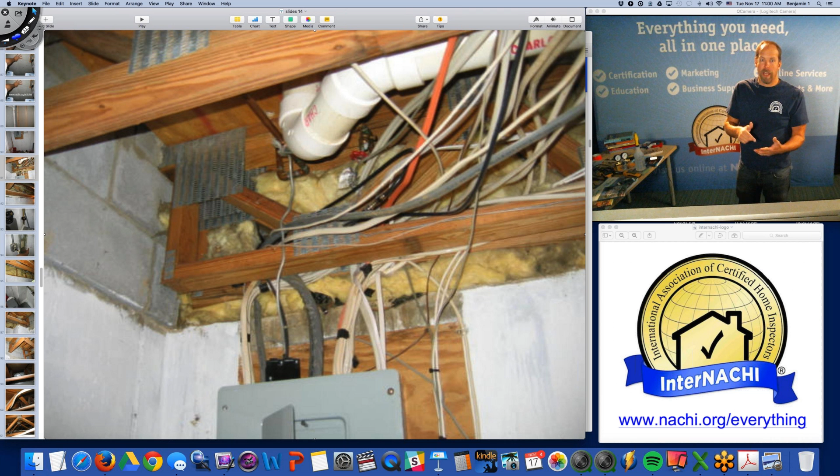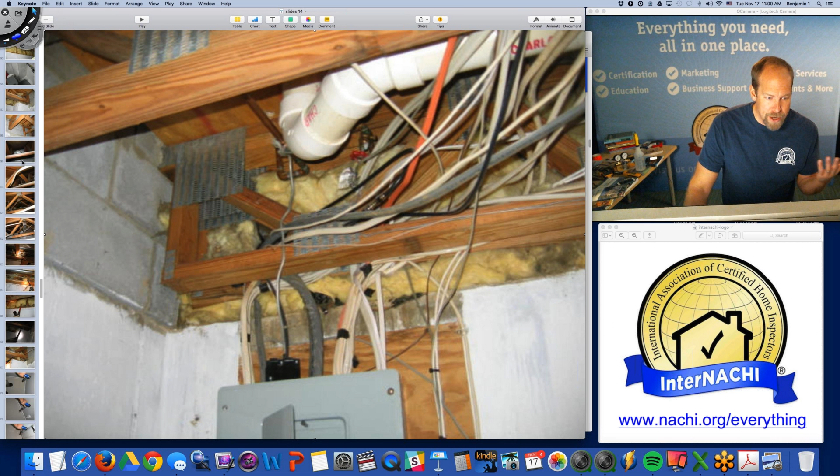Doesn't matter what the code actually says, it's the person who has that local authority. So I don't know your local rules, but if you're required to use a mirror, use a mirror.

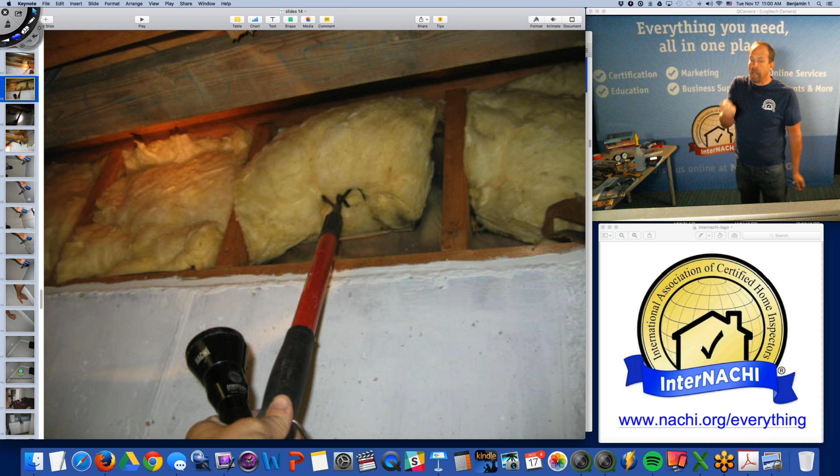So that's a 3-tine hoe that I use. It's a gardening tool with 3 tines, and I bend them: one is straight, one is a little bent, and one is really curved. So I can move insulation and put it right back. You're not required to move insulation, but that's what I do to find stuff.

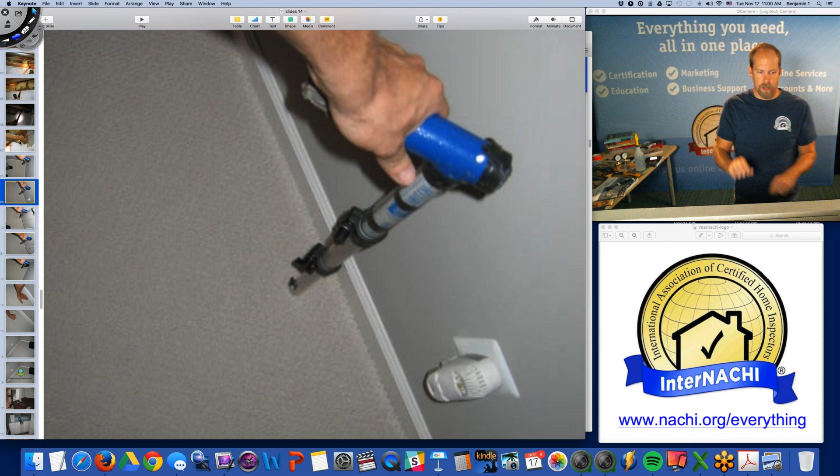And that's a moisture probe, providing an audible signal and a light sensor to tell me if it's sensing moisture. And that's actually a covered sump pump, so there's a sump pump pit there with no pump. It's hollow. I had to use my hand to find it.

This is a great tool, your hand. Use it, take it wherever you go. Hopefully everybody has 2 of them. Use your hand for testing moisture, temperature, and also sound.

But also, this would have picked it up as well, because there's a bit of a temperature difference between the carpeting that's lying on the basement concrete and the carpeting that is above a cavity.

If you wanted to learn more about how to inspect for moisture intrusion, you can become an InterNACHI certified moisture intrusion inspector. We have a certification program for that.